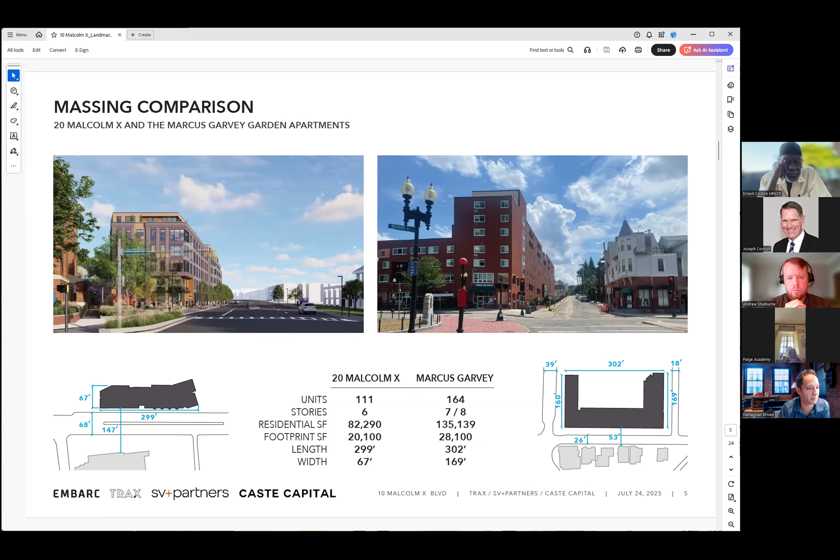Thank you, Andrew, for asking us to look at that.

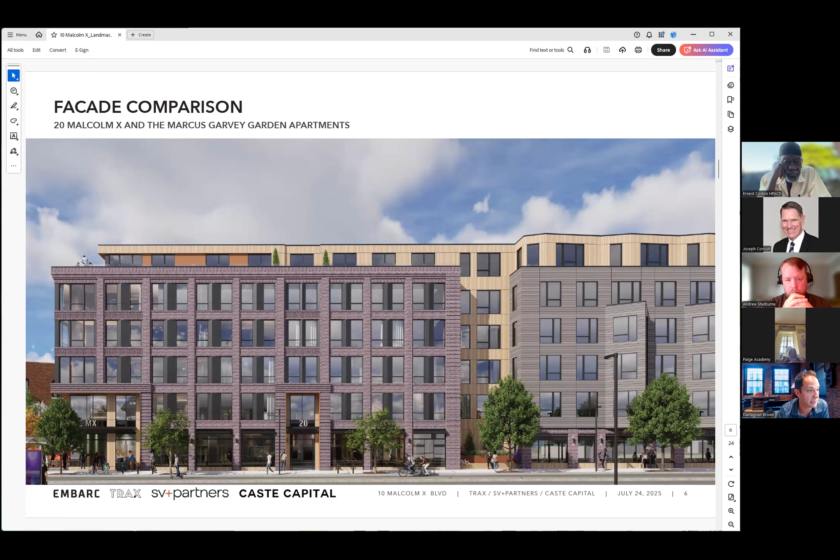Here we've done an elevation view of the 5 stories of brick, that rich detailing we talked about, with the setback that breaks the length of the building. And then in comparison, the 7-story with that center section that steps up to 8-story, just showing the quality in architecture. I think what we're very proud to have in our building.

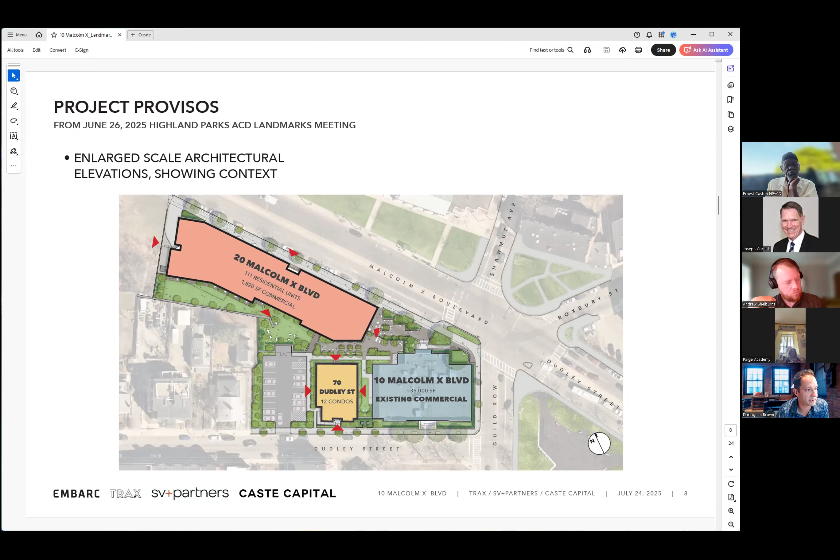With that, we're jumping into elevations. So what we've done is gone through for both buildings and shown this, again stripped down, removing all the trees, but just wanted to really get to the quality of the architecture and show you key moments, not only in the elevation, but the use of that detailing and calling out the richness of the brick, the cladding, the windows, the wood trespa.

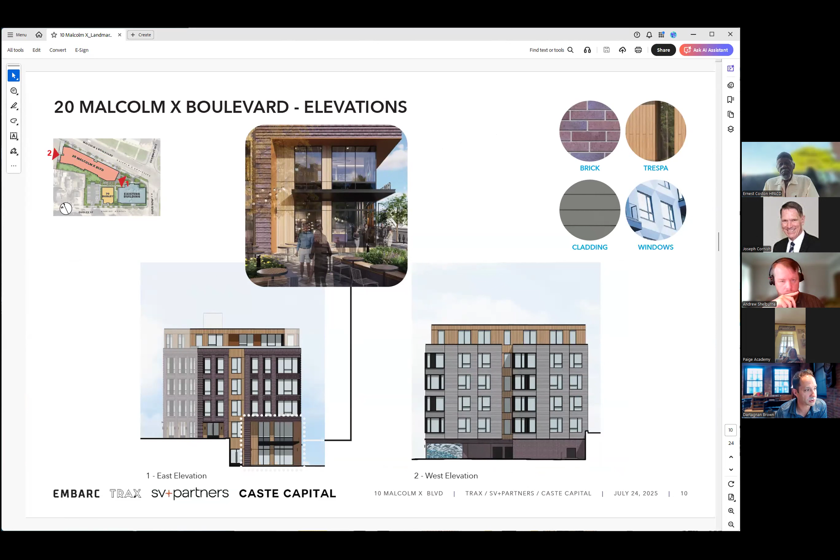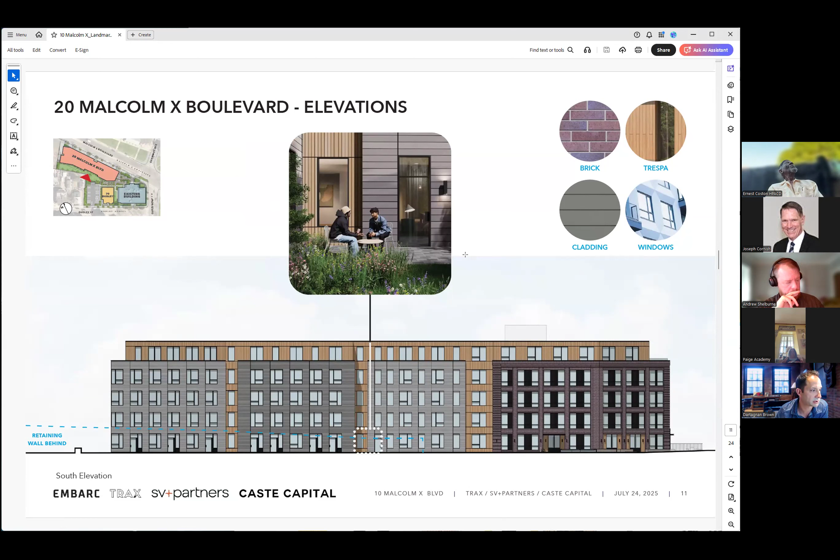As we flip around to both the east and west ends, here you can see the detailing of the first 2 stories at that community commercial space that spills out onto the public plaza. And then as we flip around, a lot of this is actually behind the retaining wall that we went through and were able to save and repurpose on site for any small section that needs to be adjusted. But this was really going to that richness of material, the brick, the cladding, and the windows, and the wood trespa as well.

And then here, what we thought was helpful is pull the snapshots of moments around the building in closer detail to just show the quality of architecture, starting at the upper left, running across the building down, the bays that we had a nice play on the neighborhood, kind of folding out with that warmth of the wood coming in, and then ending up with the lower left at that community-based retail.

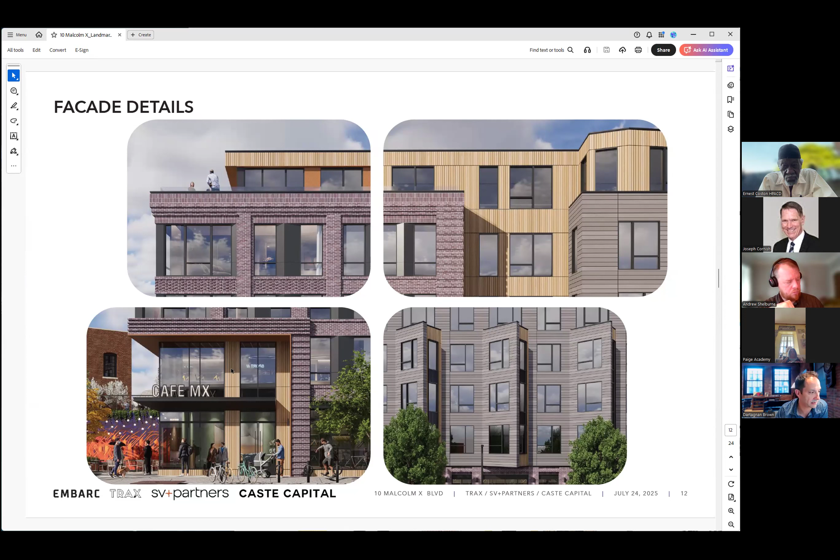As we flip over to Dudley Street, I think, Andrew, you pointed it out that we are at 3 stories, even though we have the 4-story right across from us at 69 Dudley, but we did work with the abutters very closely to reduce that height, and it kept it in line with the existing building at 10 Malcolm X, which will remain. And I think, Joe, as you pointed out correctly, we will preserve the quality of that architecture and under a separate application, come back for work around the future restoration of that.

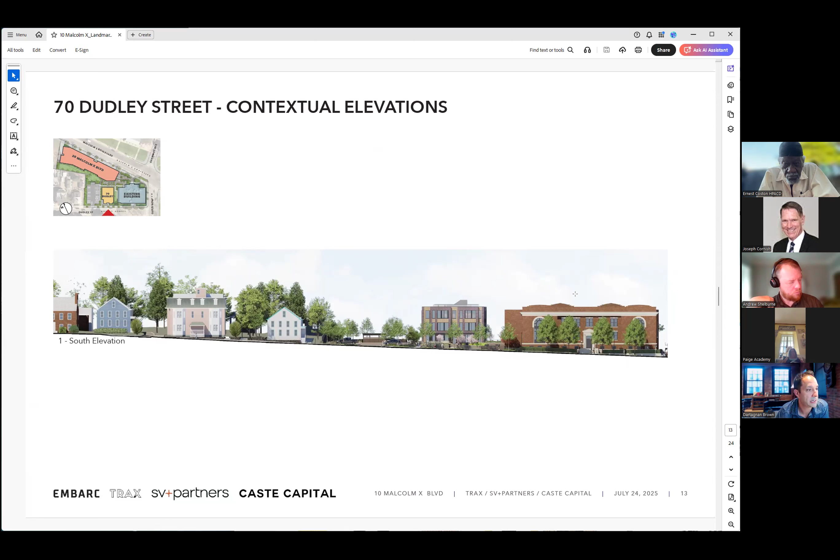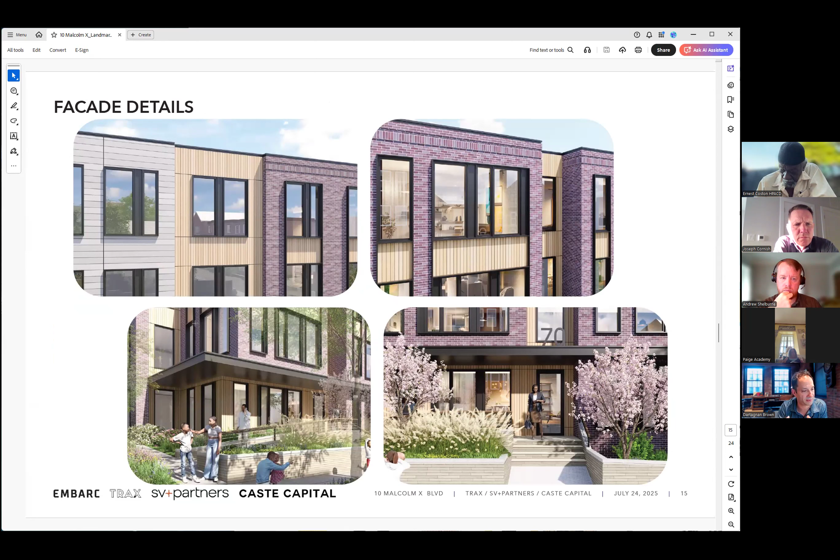But here, honing in on the elevations, moving from the south to the east, down to the north and west, again calling out key moments, but really looking at the scale of the building, changing the quality. It is a three-story building, so while we have the brick and the warmth of the trespa, we are looking at a different scale, both in window size, kind of more private entry moments, as it relates to the 20 Malcolm X. So a little bit of a different tone brought down in scale for this building.

Excuse me, Mr. Brown. The material you mentioned, the trespa, is that the tannish material? Yes, that's correct. Okay, thank you.

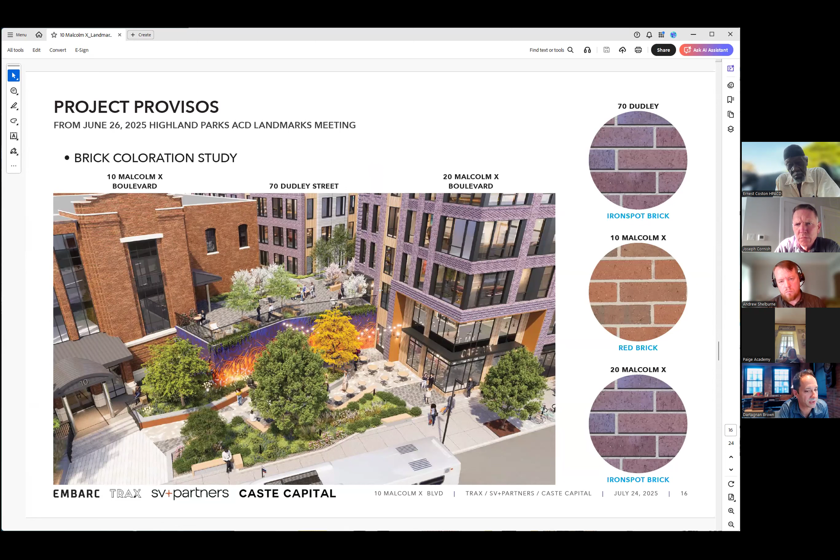Okay, thank you. And then here, I think this was a very cool study for us to look at. We discussed our setting up of the materials for 20 Malcolm X and that kind of iron spot brick, the red brick at 10 Malcolm X, and we had originally proposed the iron spot at 70 Dudley. What we've done is shown, within the neighborhood, there is quite an array of brick color and tone, which we think makes up for the richness and the character of the neighborhood.

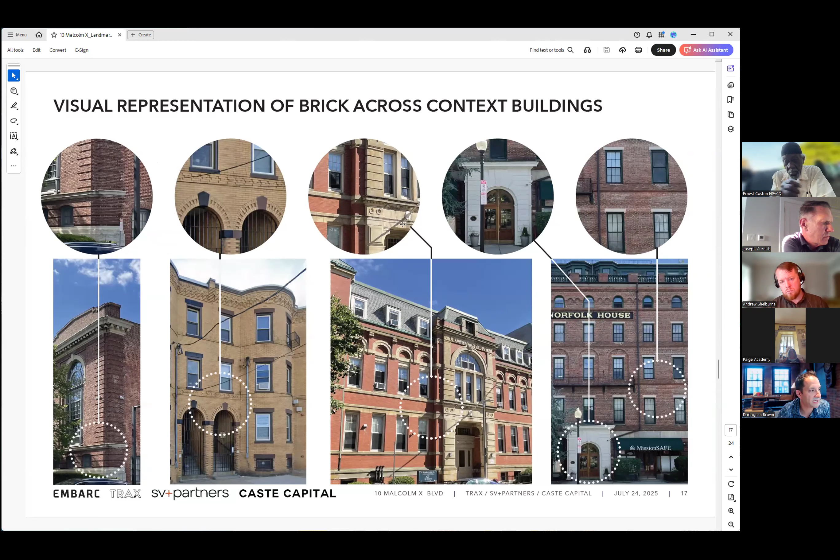And what we've done is taken the view which we had with the iron spot, as it was, and then looked at flipping it to more of a Sahara buff brick as one optionality. So not trying to match 10 Malcolm X, but differentiate, which we think is interesting because of the varied tones along Dudley and the neighborhood. And then this one where we maybe bring the warmth of the trespa in, but go to a red brick similar to 10 Malcolm X.

So the real question was, do we carry the iron spot from 20 Malcolm over to this building, or do we introduce something like the Sahara buff, or lastly, do we try to match the 10 Malcolm X? Love to get commentary on that. I think we have our take on that, but appreciate everyone's comment. And with that, Joe, thank you, and to the commission for your comments.

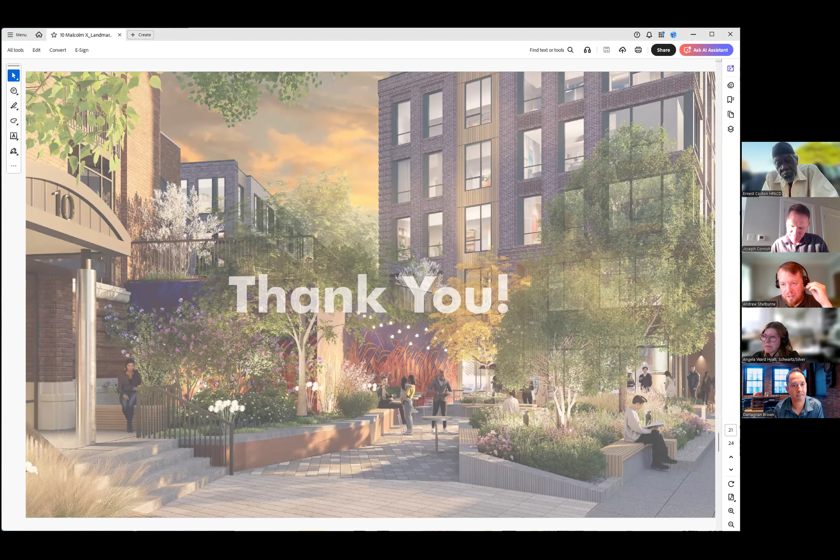We appreciate it. All right, commissioners, who wants to go first? Well, because you put it out there, I would love to know what your take, what the design team's preference is.

Yeah. Thank you, Angela. I would say personally, either the Sahara buff or the iron spot. I would tend to stay away from trying to match the red brick, just because I don't think, given the age of the red brick, and I think we've been the believer, if we acknowledge the new and not try to mimic the old, it's going to be much more impactful. And I think a stronger design, and if anything, really highlights the historic nature of the building rather than trying to compete or match it. So I would be completely happy with the Sahara buff. I think having the 3 tones on site is actually quite cool, and it's a little bit more warmer in scale, in tonal quality as the scale drops. So if the commission is happy with the Sahara buff, we would love to proceed with that.

Well, I thank you for looking at this. I think this might have come from a comment that I had, because I was looking to have more difference in this little piece facing this side of the property. And I really like the Sahara buff. I think you're right that there is an array of different brick tones in the district, and that by doing this, you really get to play on the array and the variety, and it's still obviously the same project. The detailing is, you've come up with a very rich, wonderful variation in detailing, and all the folds and the brickwork that you're doing, and the material palette. But by choosing a different brick color, I think it really is nice how it turns the corner of the project. So thank you for looking at that.

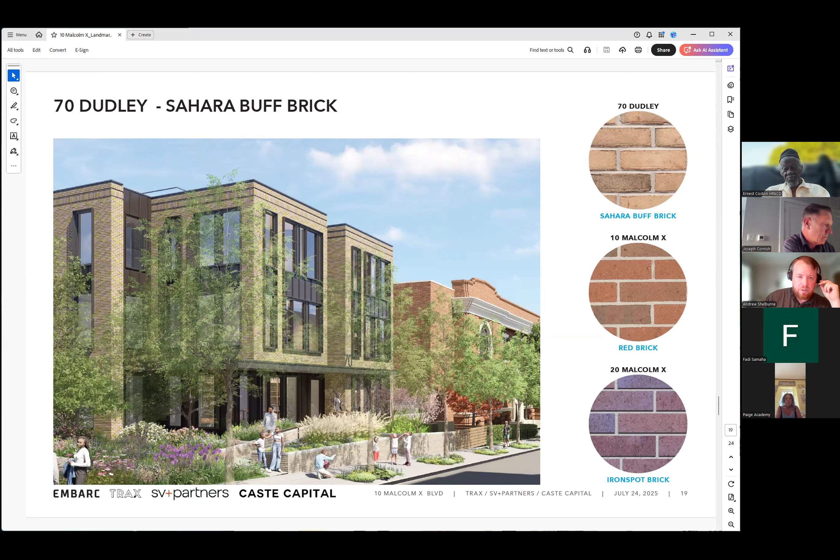I thought you guys did a great job of the comparison to Marcus Garvey Gardens building. I appreciate that. I was actually, you exceeded my expectations with that comparison. So I thought that was really good. Thank you, Andrew. I appreciate that. And you did an amazing job of responding to Commissioner Ward Hyatt's proviso with the brick elevations.

Thank you. The renderings are really incredible. I don't know if you guys do that in-house, but that's really impressive. Dan is the leader of that. I appreciate that, duly noted. They're very good. I appreciate the strong detailing of this building. All the buildings are very well detailed. So that's really it, I'm happy.

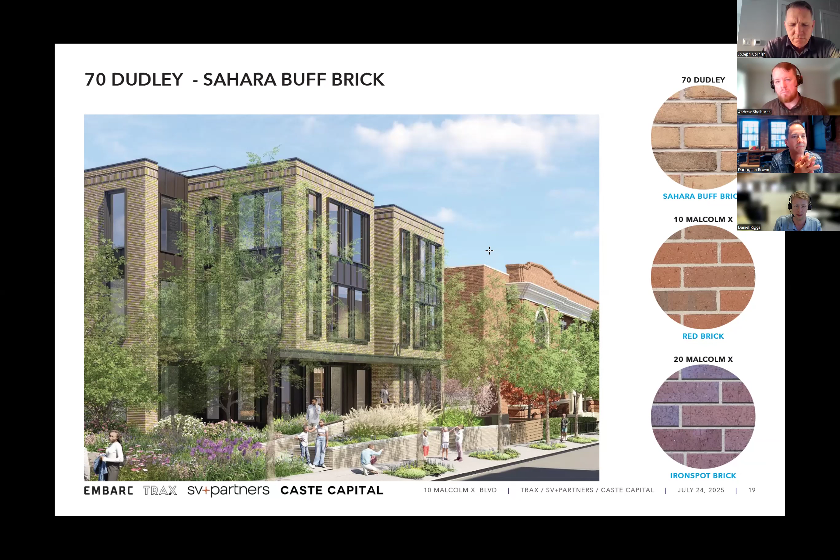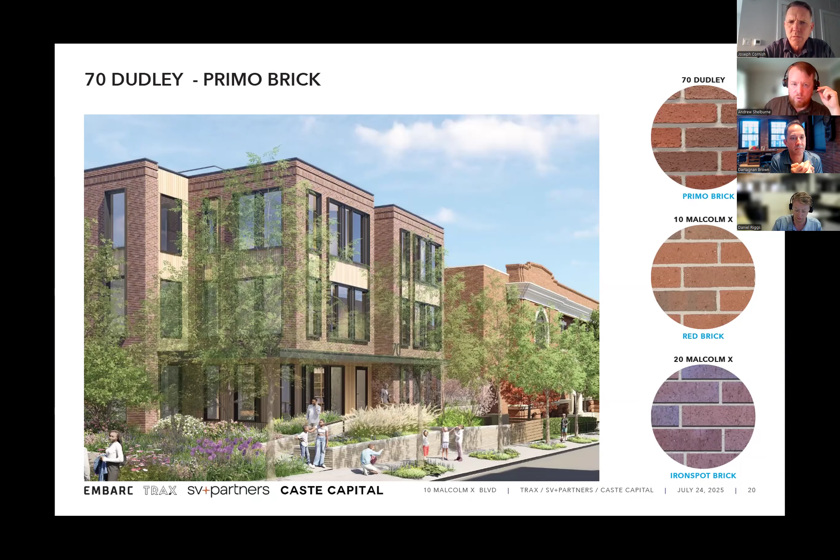I guess we have one thing. If I could, we do have that retaining wall. If we can just make some kind of comment about deviating from the study report, I think we can get through that and to public comment. Thank you, Andrew, and sorry Joe for not sharing. I thought I'd open it up to questions. So does anyone want to take a stab at that?

We're required to, if there's a shall statement in the study report regarding a certain thing, we're just supposed to give a reason why we're deviating. Andrew, can I make one comment? The study report does allow for modifications, it's under B8. Yes, I'm aware, Joe, and that's for creating an access point.

I think was this related to access at all? Well, the thing of it is right now there's no access point needed, right? But as soon as you put a building there, that access point becomes needed. So it's kind of a chicken before the egg sort of thing, I guess. I don't know how to explain this, but right now there's currently no issue with the access, right?

The building could be modified to make an access point, not instead of the wall. But so we just need to say why we're supporting changing the wall, per the words in the study report. I'm sorry to be such a stickler with the language in the study report, but we get into trouble if we vary from that.

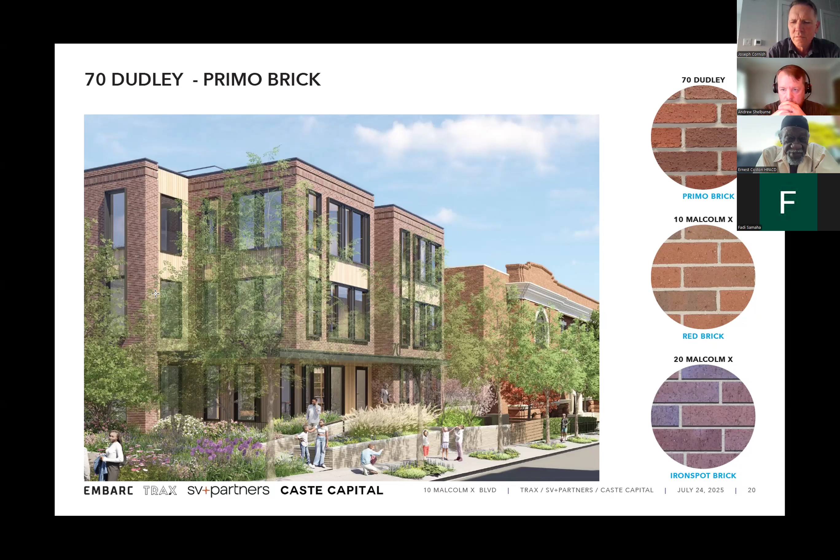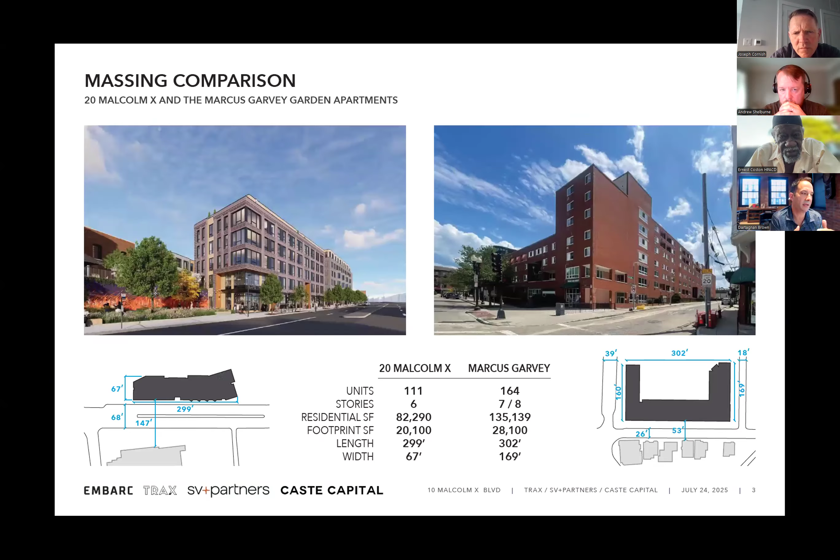So does anybody want to take a stab at that? Well, I'm confused now, there's no destruction on the wall. The retaining wall remains, and so there is access without having to put the wall in there. So there is what they call emergency access, or it allows us to get access along the, I think if we're looking for a word around it, we are allowing access to the full back of the building.

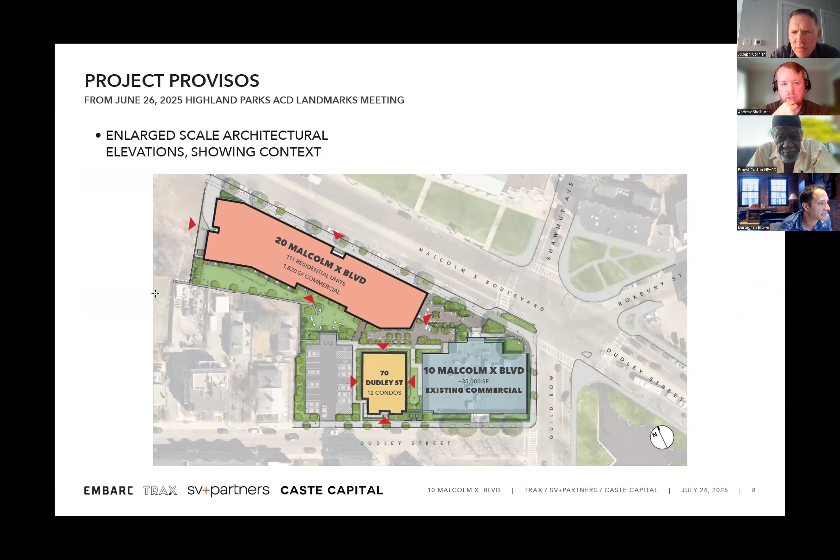Okay, which, sorry, go back to that slide. You were just on it, Joe. Yeah, the site plan, if you can zoom in there into behind 20 Malcolm X, please. Yeah, I can. There you go. Can you see how the wall turns there?

That's Commissioner Costin. We're just moving the wall and turning it. So that actually, Andrew, to your comment, allows access to the rear of the building. If it continued straight, it would actually block access. Right.

Okay, so I mean generally I'm okay with this. I just wanted to make a statement about us not following the study report and stating a reason why we're not doing it. I think you're doing the wall justice with how you're turning it, and that courtyard area is quite nice. So I'm okay with this, but I guess we're making an exception here in this case.

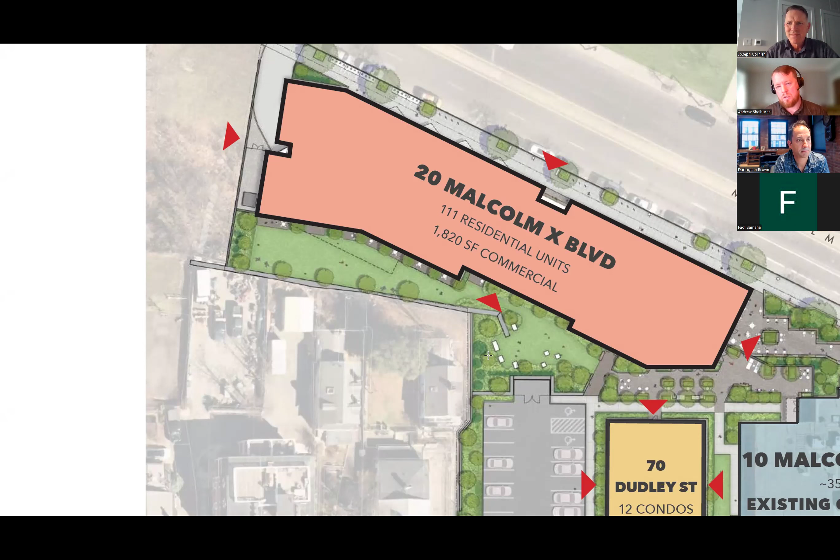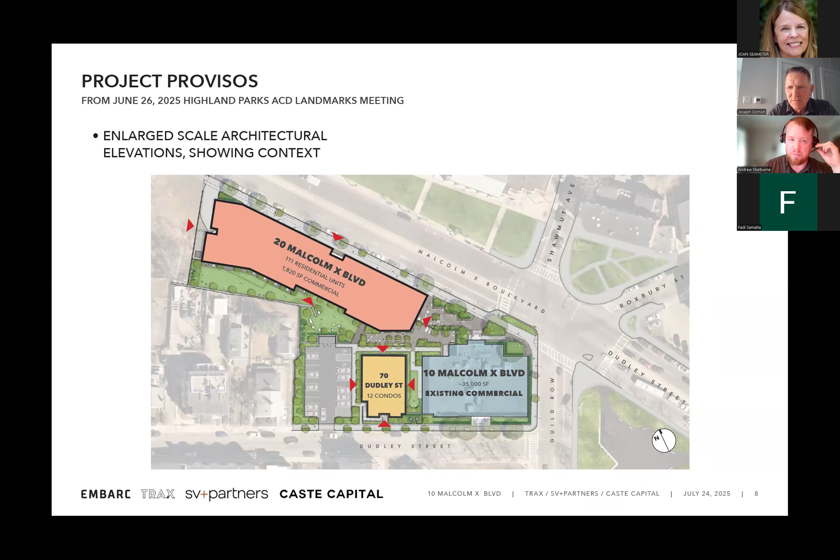Thank you. So can I motion to approve this project with these provisos, or how does this next step work? Yeah, you can make a motion to approve and read out the provisos. Actually, no, sorry, we cannot go to motion right now, we have to have public comment. Oh yeah, okay, my apologies to the public. Let me get to the script here.

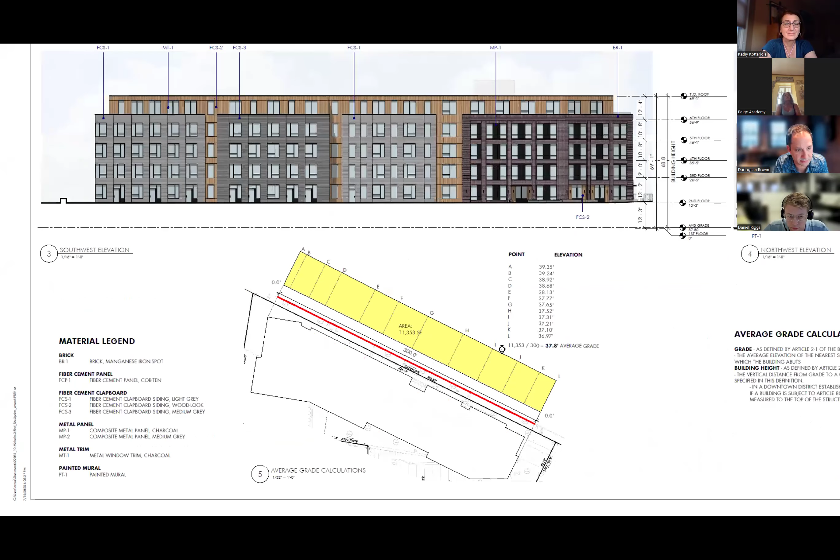Go back and look for it - but it was definitely in the deck, and I think something like - Dan, correct me if I'm wrong - where we are removing the trees along the parking edge, keeping the mature trees along the street, and we were up like something like plus 70 on the tree count and something like 130 on the caliper inches. Yeah, that's right, we had a net gain of 74 trees, from existing. So we had spent, Ernest, quite a bit of time during the BPDA Article 80 process to address all of that.

Okay, I don't recall that part of the presentation, but that's on me. It was included. And so tonight we came back to really present the three provisos that the commission had kindly outlined for us. All right, thank you. Thank you. So, does anyone want to second my motion?

I will second it. I will do the roll call vote. Commissioner Shelburne? Yes. Commissioner Samaha? Yes. Commissioner Cook? No. Commissioner Ward Hyatt? Yes. Commissioner Costin? I'm going to abstain.

So this is Commissioner Celina. Oh, I'm sorry, you joined. No, I joined late, my apologies, I just wanted to let you know I've been here. Do you want to abstain since you may have come in late? No, I heard the bulk of it, so I will say yes. How much of the presentation have you seen? I've seen the entire presentation, and I was here for part of it and all of the public comment.

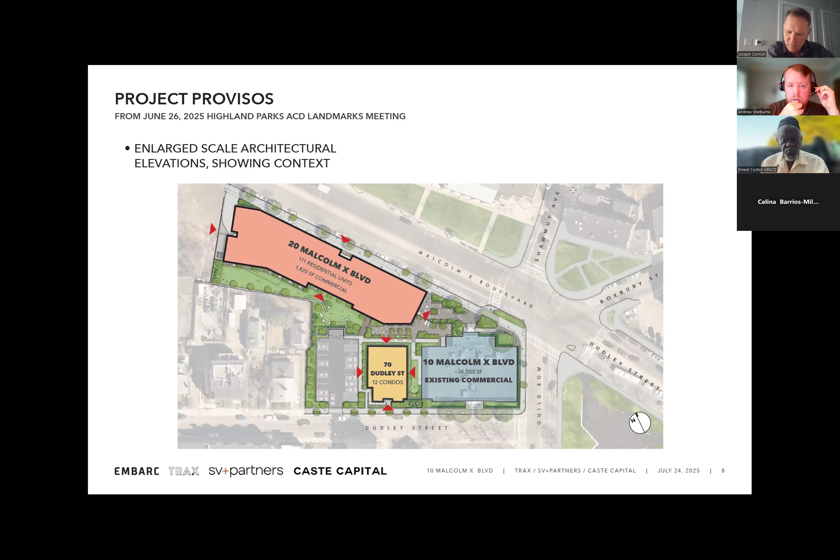Okay, thank you. All right, so we'll move to our advisory review next.

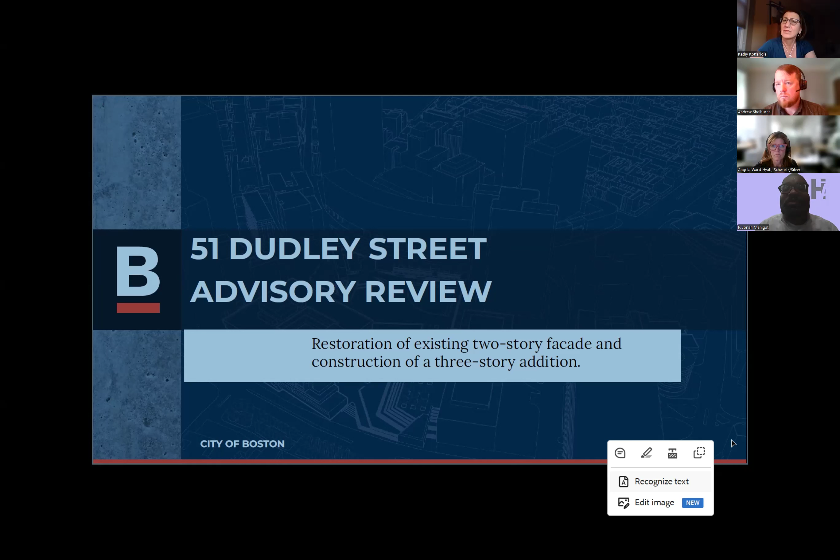My apologies, this is Commissioner Cook, I tried to wave my hand but for some reason I was not allowed to, it was blocked, I don't know why. Commissioner Cook, I'm sorry, I didn't hear what you said. I have to leave the meeting. Okay, all right, thank you, appreciate your attendance.

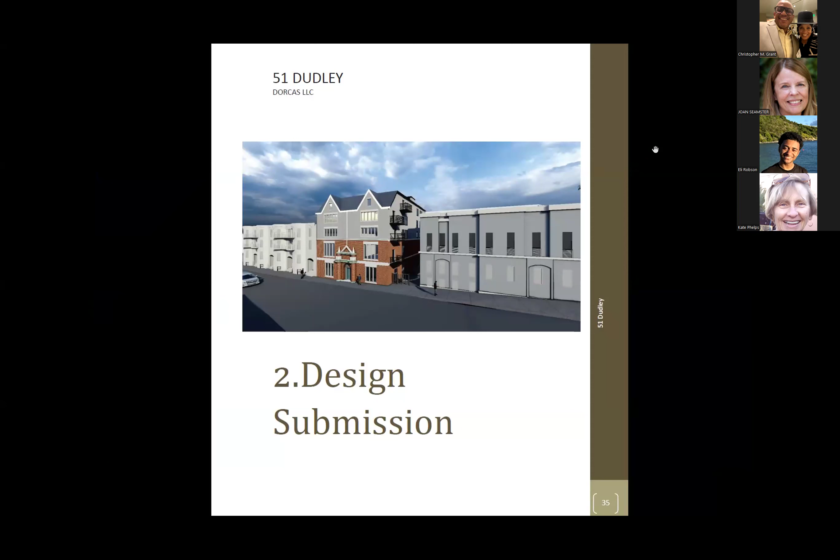Can you guys hear me? Yes. All right, would the team like to share your own screen? It seems like someone has started sharing. I'll stop sharing if someone from your team wants to share. Okay, I'm gonna try to share, is that all right? I'm on the road, so if I have a problem, someone else will try to share.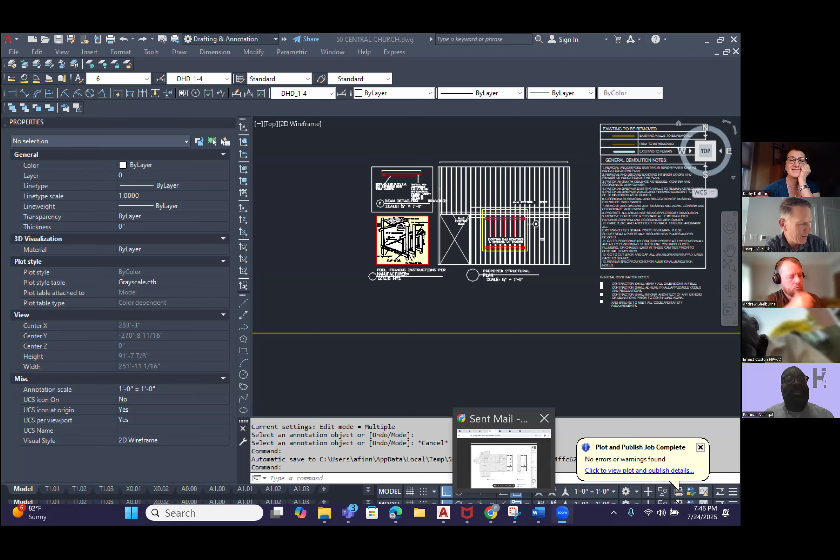I'll give some background: the existing building was designed by architect Augustus Warren Gould and built circa 1895 as the clubhouse for the Dudley Association. It later served as the headquarters for the Lettish Workmen's Society, an early part of the organized labor movement in the United States, and then became a Masonic lodge. A fire in the 1980s destroyed the upper stories of the building. Staff notes the applicant has been working closely with the planning department and staff at the Boston Landmarks Commission to develop the current project proposal. So with that, I'll turn it over to you.

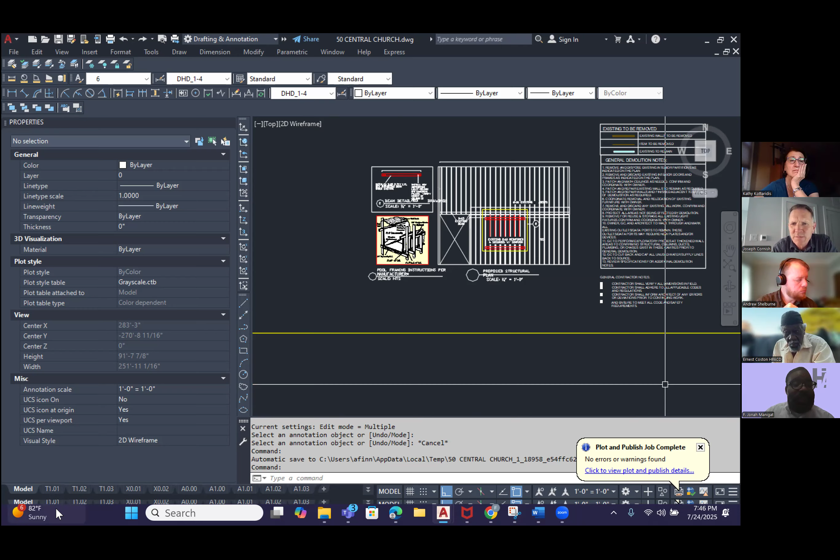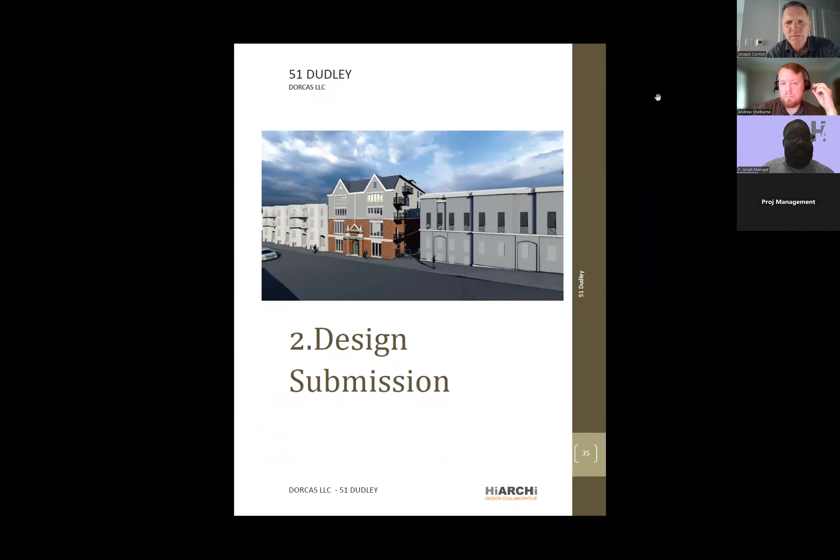Let me see if I can get to the screen I'm looking for. I don't think that's it, just bear with me here. I'm happy to present if you'd like. Why don't you go ahead? Okay, I'm not at my desk, I'm on the road and having a little trouble here. Hopefully everyone can see this. Well, I can't for some reason. Why am I not seeing it? Commissioners, can you see this? No, I'm seeing someone looking at AutoCAD drawings. Oh, because maybe I'm still sharing, the proponent is still sharing. Okay, I stopped sharing, hopefully that will work. Can you see my screen now? Yes.

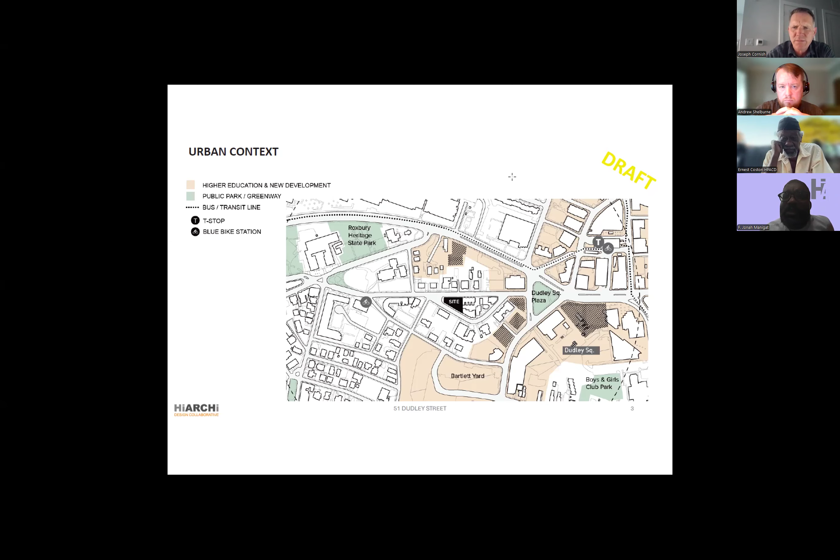This project is being proposed at an old site which I believe was a Masonic Lodge at 51 Dudley Street. If anybody's familiar with the neighborhood, it's a building that's been vacant for quite a few years, quite an eyesore, that the client is proposing to revitalize and turn into 18 residential units.

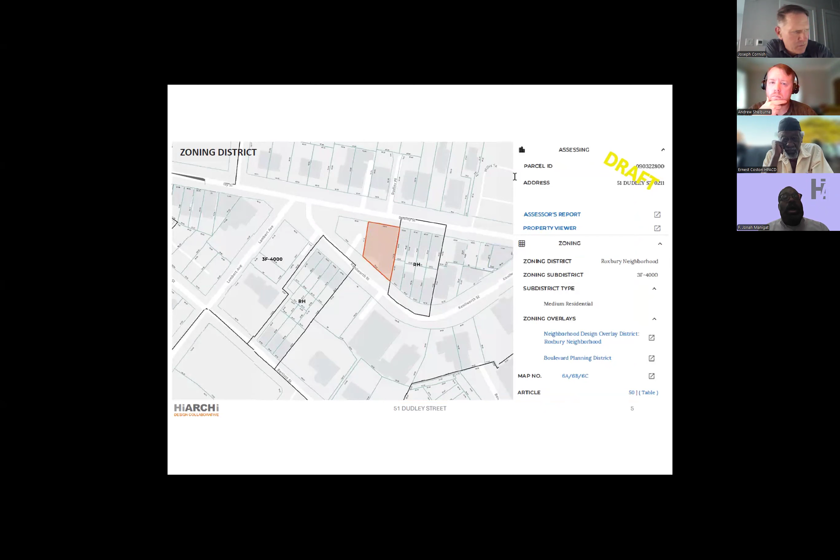What we have done, as part of an edict from the client, was try to bring the original aesthetic of the building as much as possible. Considering the program has changed from a public use to a residential use, the actual uses are changing, but we tried to keep the flavor and architecture of the building as much as possible.

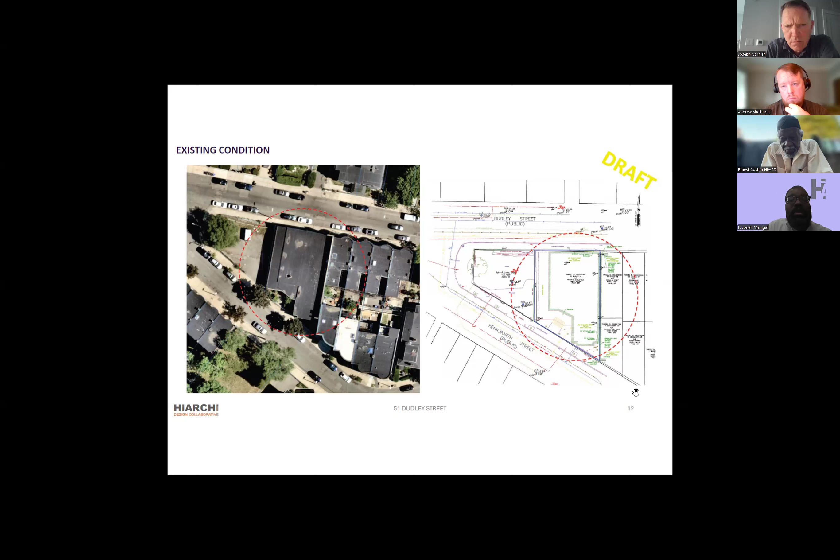In these slides you'll see red boxes. The white part at the bottom is the existing building, and we're showing the red on top to show, for massing and scale, what we intend to add to the building.

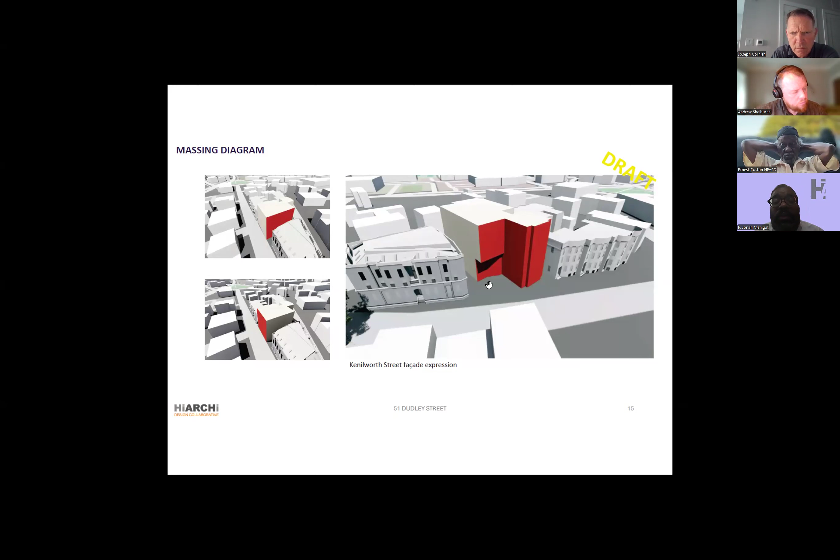A couple more views showing where we're doing interventions and adding to the building, on the left two slides. You'll see views from Dudley Street, and a view of the corridor between our building and the proposed building at the corner. On this one, that will be the view from Kenilworth Street.

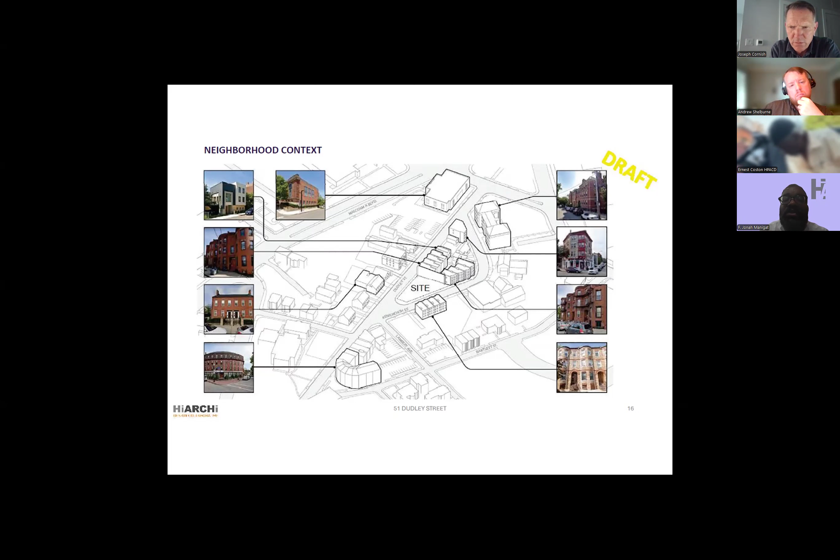If you walk the Holland Park neighborhood, especially in this little cluster, you'll see a lot of different architecture. You'll see some tall buildings, some short buildings, some with hardy plank siding, and a lot of brick buildings. You'll see some modern buildings recently added to the street, along with a lot of townhouse-style buildings added in the last 20 to 30 years. So it's an eclectic mix of different building types, not just one language in the area. I think our building will be a nice addition to the different architectural styles that currently exist in the neighborhood.

Next slide please. This slide talks about the alleyway we discussed. On the left here is the proposed building, and the right is our building. In between the two buildings, we're creating what we're calling a pedestrian corridor that would allow you to go from Dudley Street down a nice green area, a greenway with a pathway. It allows you to go up a set of stairs to a common deck facing Kenilworth Street, and then down to Kenilworth Street. Right now the two streets are disconnected, so this is a way of connecting Dudley and Kenilworth Street, allowing a pathway between the two.

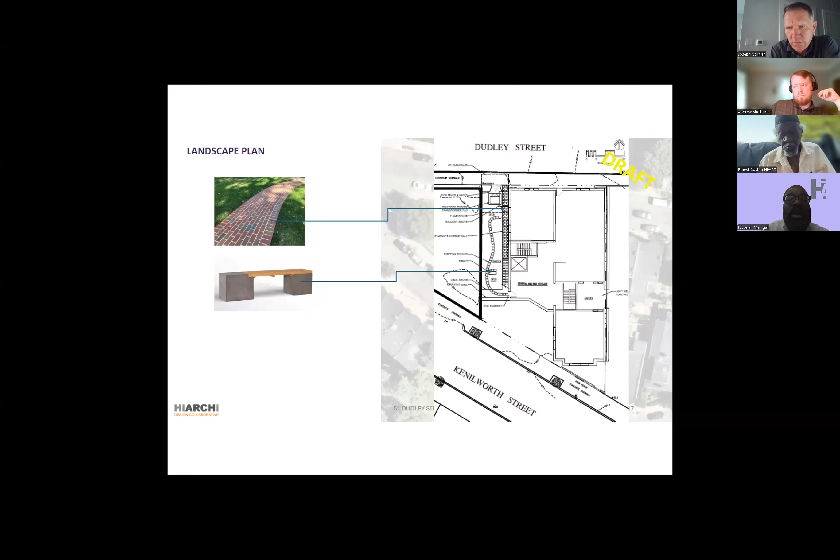Next slide. This slide talks about ways we're thinking of enhancing the streetscape. Our main accessible entry to the building will be on Dudley Street. What we intend to do is keep the original historic entry to the building, and just do some minor modifications via the sidewalk, and maybe the step at the front, to allow the building to become accessible from this end. This will be the official front door of the building, so we'll make that accessible, and we'll look at ways, with help and permission from the city, to add some street trees to beautify the sidewalk as you enter the building.

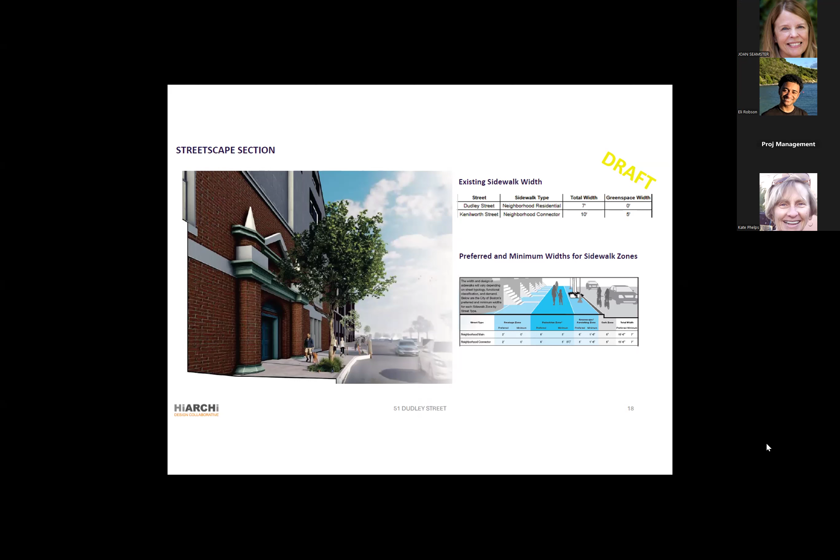Next slide please. Here we start talking a bit more about the architectural site plan of the building. You can see the shaded area on the left-hand side - that's the proposed building. Again we've got a pedestrian corridor in between, then we have a proposed building, and on the right you can see some rooftop views of where the building is going.

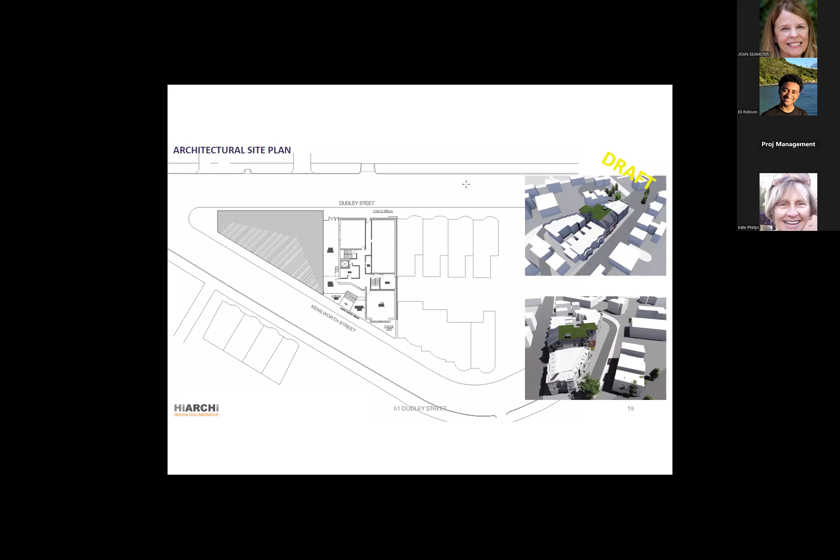One of the things the owner has asked us to do is look at a way to make the building as sustainable as possible. So other than using materials that are sustainable, along with the windows and the energy systems, heating and cooling systems we plan on using, we're also thinking of adding a green roof onto the building. It will not be a green roof open to the users for entertainment or anything like that, but it'll be mainly to help with the load into the building. We don't know exactly if it's going to be a tray style or a planted roof, we're still debating that, but it will be some sort of green roof at the end.

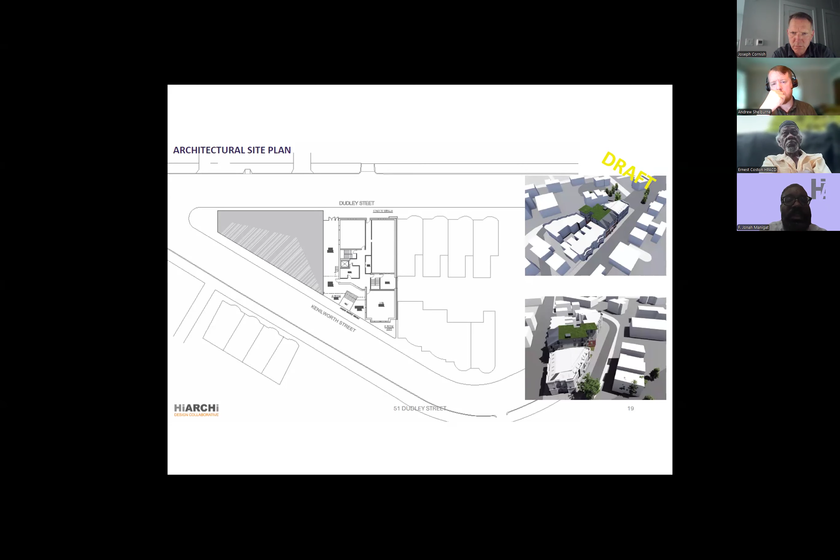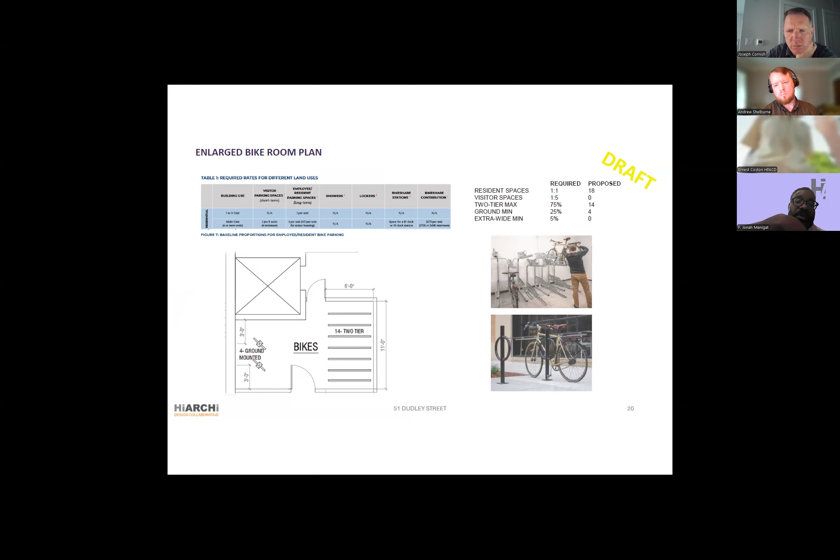If you go to the next slide please. We're proposing 18 units, and we're proposing 1-to-1 bike spaces for each unit - there will be 18 bike racks in a secure location in the building, accessible either through the pedestrian corridor I've talked about earlier, or through the building while you're inside. So the tenants don't necessarily have to go outside to get access to it. They can get to it from their unit, or from the exterior coming from Dudley Street, or even from Kenilworth, from the common deck I brought up before.

So here's a couple of the unit summaries - what are we proposing? What we're proposing is a mix of 2 bedrooms, 1 bedrooms, and studios.

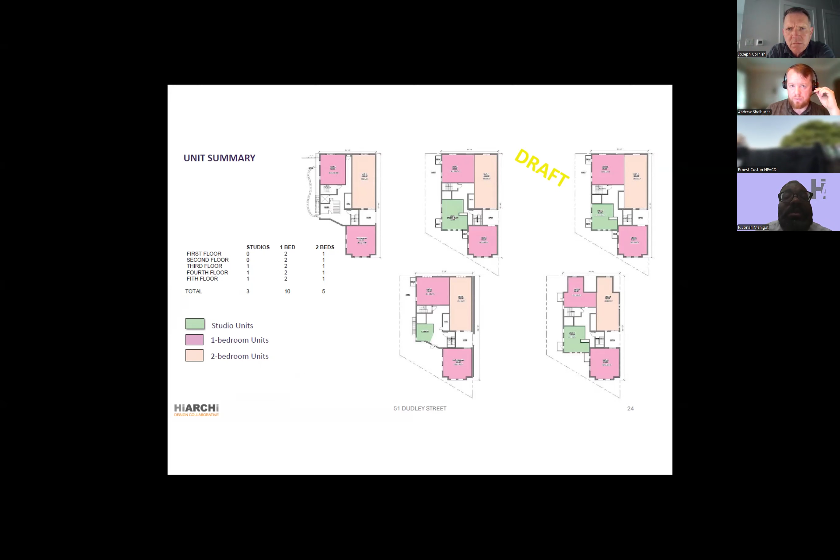Excuse me sir. So we don't really have any jurisdiction over the interior of the building. Okay, well then we can skip that. Yep, if you can just skip that, yep, that would be good.

That'd be great. It's fine with me.

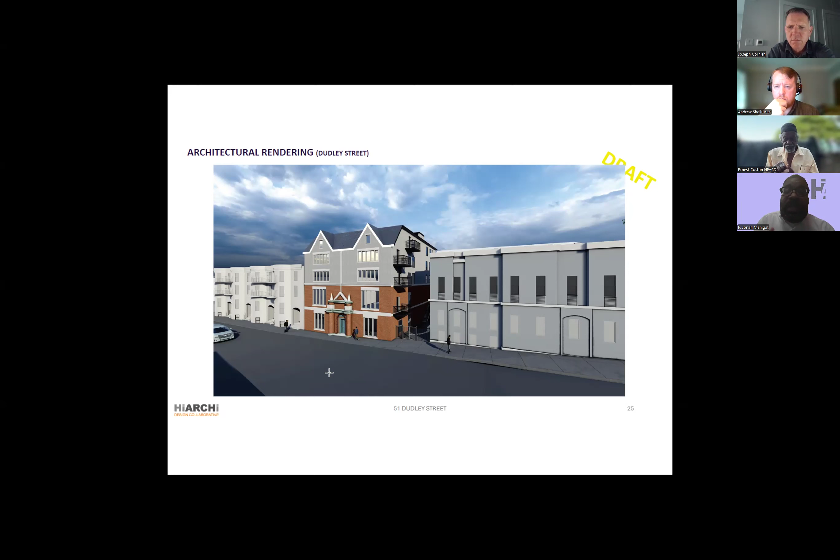The bottom part rendered in brick is the existing building we want to keep as much as possible. After many conversations with the city, including landmarks and BPDA, our hope is to keep the historic part of the building intact and add a 3-story addition on top, using material that will not compete with the brick, while keeping proportions in keeping with the historic nature of the original building. A further slide will show what the original building looks like.

I think you just skipped to the Kenilworth side. This is what the building will look like on the Kenilworth side. In this view you can see some inkling of the green roof I mentioned before, the common deck I talked about, and the brick part, which is a lower level that will remain.

Next slide, a couple more views from Kenilworth. This shows a better view of the common deck, and the pedestrian corridor that allows you to go from Kenilworth down to Dudley Street, connecting the two streets, which right now does not exist. Next slide.

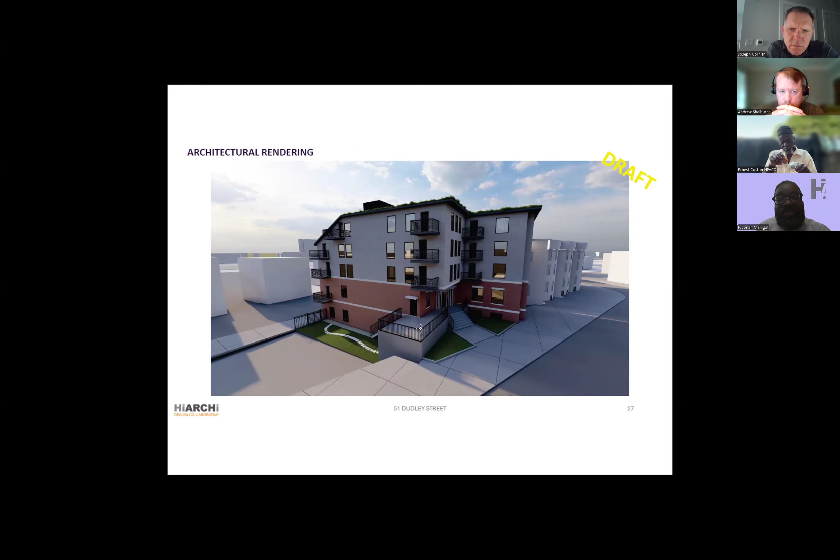A couple more views from Dudley Street. That gives the building a little bit more context between it and its neighbors. Again, more slides. Thank you, I think those speak for themselves.

Speaking of material, what is our hope here to use? Our understanding is it'd be very hard for us to replicate the classic brick that exists in this building, so what we're trying to do is not compete with or mimic the brick. We want to introduce a different material for the upper floors that will complement the existing brick. We'll wrap that around the pedestrian corridor and bring it back into the Kenilworth side, which I think will tie in the building pretty nicely.

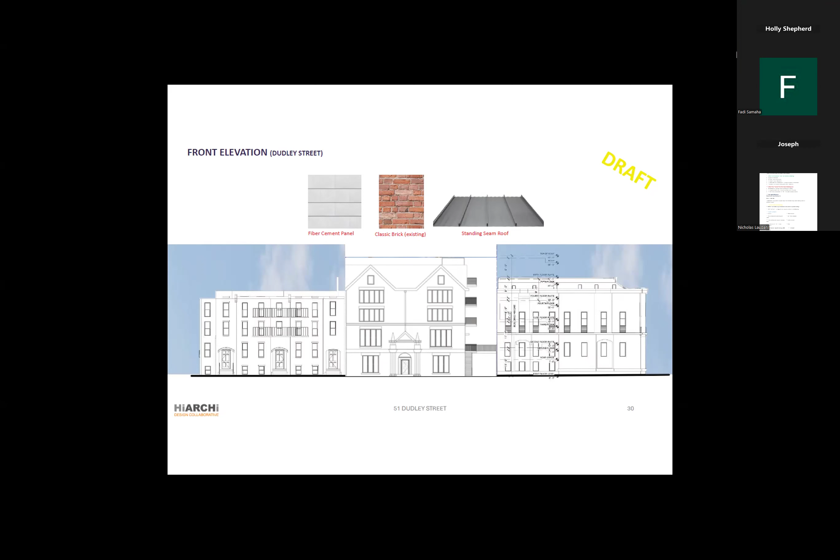So now we have those two gables on the front that reminisce of the original building's look, and our hope is to use a standing seam roof at that front part of the building, and then of course as you go towards Kenilworth, we'll have that green roof.

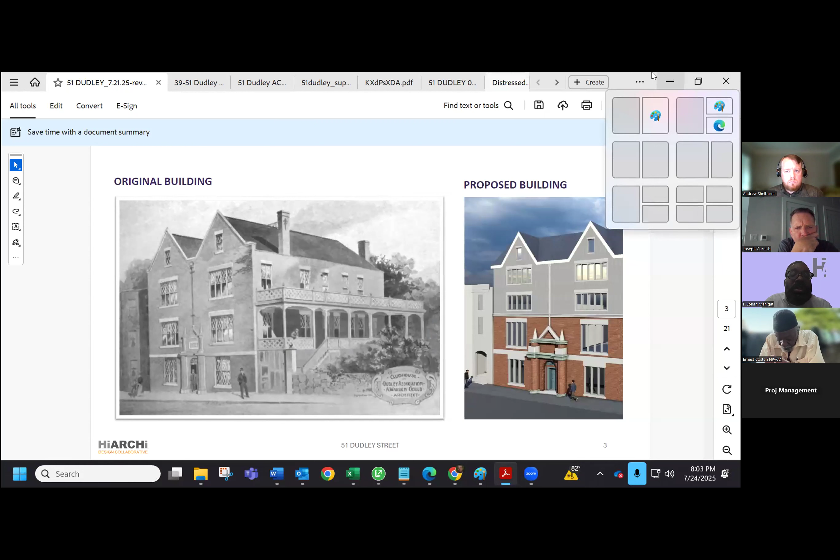Also important to us is keeping the relationship of our proposed building similar to the relationship of the historic building to the townhouses. If you look at the townhouses on the left of both buildings, you can see the relationship between the townhouses and the original building, and the townhouses and our building. So we feel like we're bringing back what was originally there in terms of scale and feel, kind of bringing it back to its original feel, for lack of a better word. That's why we have the gable roof style, reminiscing.

You can see the windows use the same kind of divided lights and scale that was there on the original building. Of course, there are some deviations because this building was more of a public-facing building, while the new building is residential. So we had to compromise on window locations for the units and interior to work. But I think we've come to a nice compromise that allows a functioning floor plate while having a front facade that respects the original intent of the building.

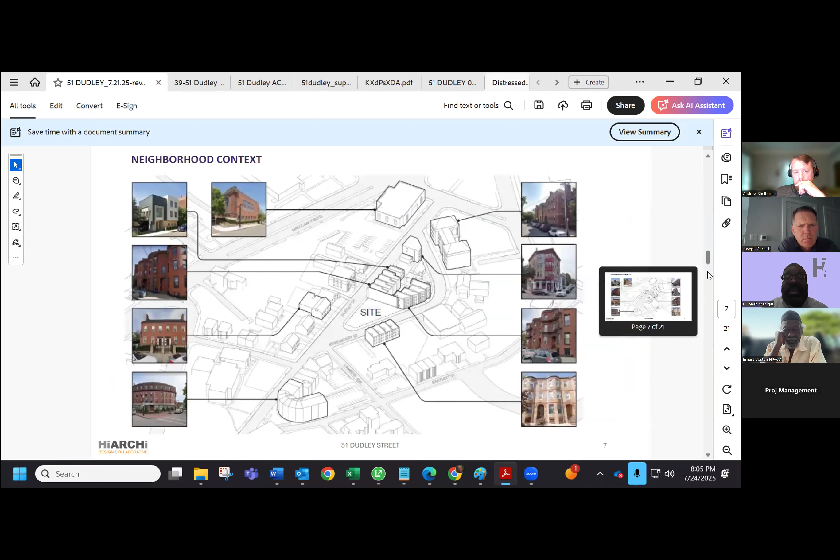Okay, is there anything else on this? No, I think that's fine. Let's see, just quickly, yeah, some of these things we talked about. We want to talk about the landscaping here.

Often people think of a light well as boxed in on all four sides, just open to the elements above. In our case, we're planning a three-sided light well, because we're going to punch an opening facing the alleyway, allowing a lot of air and light to come in, creating a little green area accessible to the tenants on the ground floor.

The Kenilworth side will also have a green planting scenario that complements the community with treescapes, plus another green space with trees and shrubs at the Kenilworth entrance. The design also includes an elevator to accommodate accessibility, which is important to us. Looking at the Dudley area, there aren't many buildings that meet current accessibility standards, so we think this elevator is very important to provide accessible units for handicapped individuals. We're working with the city and the accessibility board on that access plan.

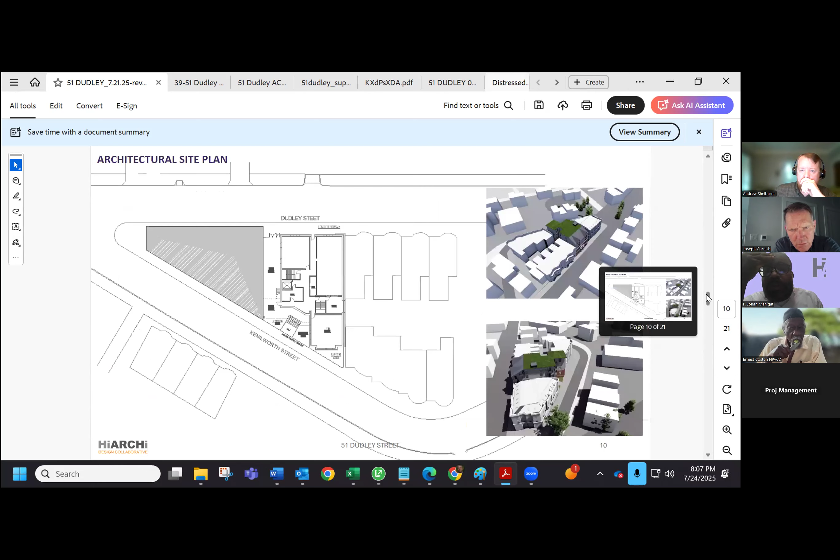Thank you, Charles. Okay, Charlie, if you can just bring it back to the slide with the historic building next to our building, then we can open it up for questions here.

Sure, yeah, commissioners, this is an advisory review, so we're not going to be voting on this project. This is just to get your feedback and comments for the project team. Are there commissioners who would like to comment first?

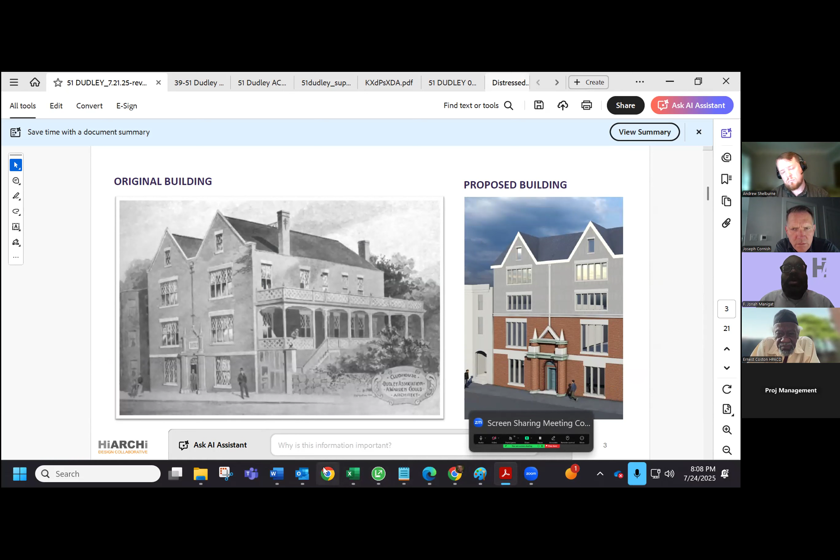Yeah, I have a question on this passageway between the two buildings. I don't see the width of that. How wide is that? It's currently between 13 to 14 feet. It's pretty generous. Okay.

And the other question I have is on the light shaft that goes down through the building. Is that only accessible by one unit? No, it'll be accessible by all units because it's off a corridor on the ground floor, so every unit will be able to access it. So it's public space on the ground floor? Yes, it's public space for the tenants. Got it, okay, got it. Thank you. No problem.

Other commissioners? I will say, per the study report, commissioners are specifically required to provide detailed reasons for every decision they make. That's page 79 of the study report. So we are actually required to make comments and share our opinions. Thank you, we're here to hear them.

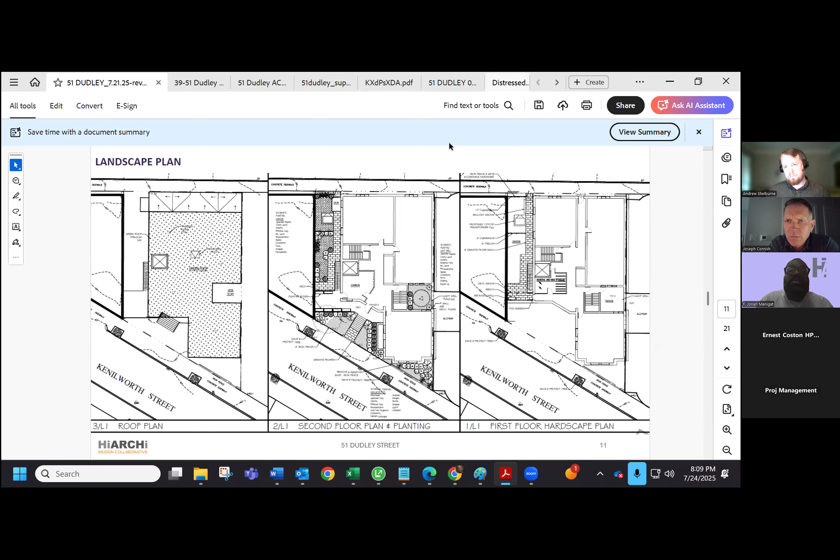Joe, that's your reading of page 79 as well, right? This is an advisory review; we're not deliberating on making a decision tonight. We're providing comments and feedback on this project, so hopefully they can come back in the future with an approvable project. Okay, but we do need commissioners to participate. We can't just sit and be quiet, that's not our job here.

Are you requesting a response from somebody? I think all commissioners should speak up. Obviously they've all taken time to review this presentation in advance, and they should have comments related to how this building relates to the standards and criteria. That's our job.

If no one else wants to go, I'll jump in here. I would just urge commissioners to read page 79.

So the original building is 4 stories here, and you're proposing a 5-story building. I would like to see the facade on Dudley Street rebuilt in its entirety. If you want to do a different roof after those 2 gables, I think that's okay, but I like that you're kind of replicating the 2 gables on the Dudley Street side.

I'm generally okay with the materials chosen, especially standing seam metal. And I agree that you should not be trying to replicate the brick. The addition materials should read differently. We shouldn't be trying to copy the brick. It's almost impossible to do that anyways.

I'm generally okay with the garden space, which is being put in place of the porch. I think that's a fine idea.

But I don't see a lot of argument to make this building 5 stories. If you referenced in your response section 8.4, which talks about diversity of building massing and height, it goes through and talks about different streets that have 4 and 5 story buildings. But the streets mentioned in that section, for instance Kenilworth, really the max height is 4 story.

Linwood Square, max height is 4 stories. Highland Park Ave, max height 4 stories. There's one building on Fort Ave that is 5 stories, and we generally only have 2 tall buildings in the entire neighborhood, which is 170 acres. We have the Norfolk House, which is 7 stories, and the Marcus Garvey Gardens building, which is 7 stories, and if you count the elevator shaft, it could theoretically be 8 stories. The Cox building is 4 stories. So there's really not a lot of precedent to go to 5 stories.

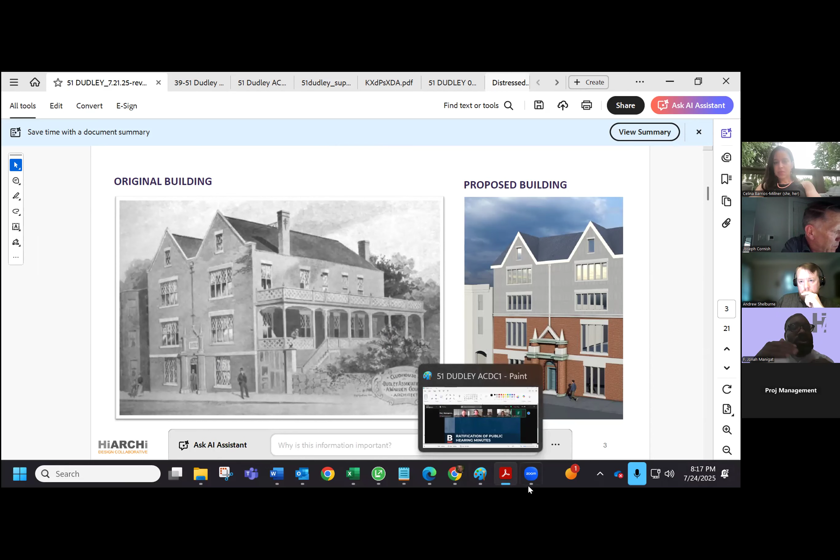I think the height works. If we look at the relationship between our building and the townhouses, and the relationship between the original building and the townhouses before all of us were born, you will see that we're consistent. So I think that's what governs this, as far as we're concerned. And if you look at other parts of the neighborhood, you will see even more drastic differences between buildings right next to each other.

I think Charles can show some of those here. You can see buildings that are basically residential, single family residential scale, right next to that 4-story building. I agree, I would totally be okay with making a 4-story building. You have precedence right down the street for that.

But what I'm trying to say is, if you look at the scale of a building, the overall height of a building, and its relationship to the townhouses, it's very similar to what was there originally. I think that's what we're getting accused of. Now, we can disagree that we should mimic or replicate that, but as a charge from the owners and through multiple conversations with the PDA and folks from Landmark, we arrive at that composition because we feel it respects the original architecture and its relationship between the building and its closest neighbor.

And I think reducing the height of the building will end up hurting the building. Well, I wouldn't — I'm not suggesting that.

Sorry, Andrew, just a comment, and respectfully, I understand your point of view. Each floor, as we measure from floor to ceiling on the original building, was 12 feet. That's the reason why our upper stories are calculated at about 8 feet each. So our story count may not necessarily reflect the proper measurement based on the original building's height. Yeah, it probably had big spaces inside the public building when it was there.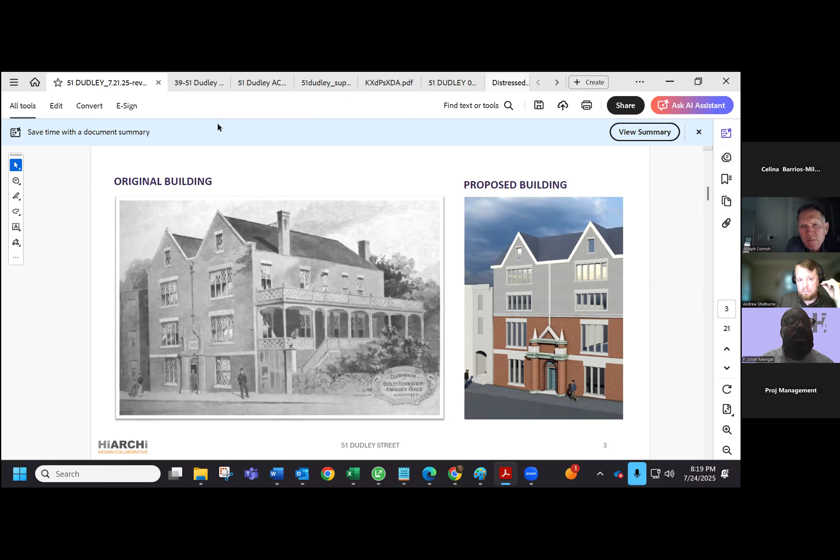But I just want to clarify that I'm not asking you to reduce the overall size of the building. I'm asking you to reduce the number of stories. So the height you see in the historic rendering, I'm totally good with that, and the relationship of that height with the neighboring row houses seems appropriate — that was what was there. So your problem is the number of stories, not the height.

Exactly. You have a lot of windows in there, and in the upper floors they look smashed in comparison to the lower floors. There's a proportional issue with the windows. The historic facade is obviously very symmetrical — the windows on the sidewalk level are smaller, but the four windows above that are approximately the same size, they look identical. In your rendering, the newer floors have different size windows than the lower floors.

Yeah, and I think from the development standpoint, obviously the architectural side is the driver here regarding the commission. We're driving the design to have a bit more density for the future relative to the original design, due to the cost of construction and the cost of an elevator for accessibility. Accessibility is a key factor in our decision making to make the building a little bigger versus going with 3 floors.

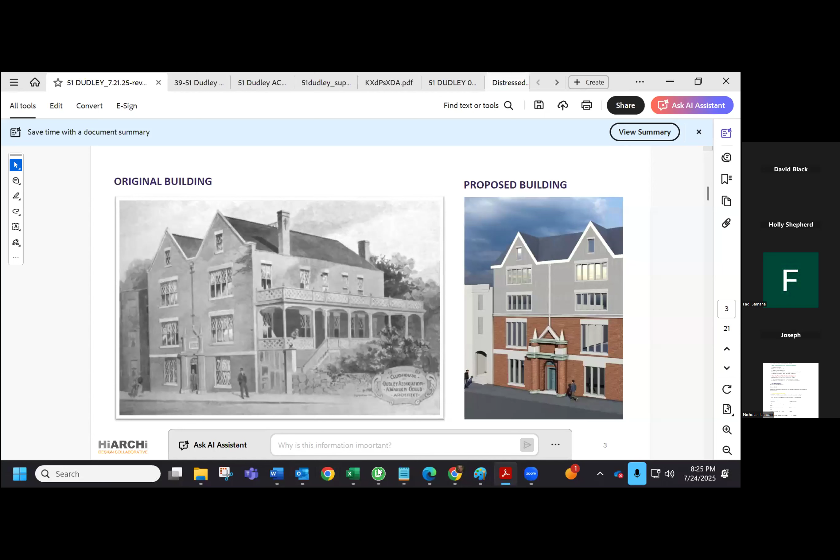Yeah, well, so one, we don't really have much to say as to how the building is used on the inside, whether it's a large public space with big windows in order to get as much natural lighting, or whether you're going to reduce it to 8-10-foot ceilings for however many units you can get in there. But what it looks like on the outside is important.

And I think that's really going to be what people are going to look at for a long time, and maybe whatever legacy we have - how did that happen? So what it looks like on the outside is important. So the height, I feel like it's sort of under control, it's within range, and if you can keep the facade and maybe change the floors and where they relate to the windows.

In some parts of the country, like Louisiana, people actually walk through windows because the windows go all the way down to the floor, and then in other parts, like Minnesota or up towards the Dakotas, they have very small windows only up to about your waist. So there's a variation in where the floor is in relationship to the windows, but the windows in this area should fit with how the building looked originally, while still making it possible. How many units you can get out of there - that's between you, the bank, and your planners.

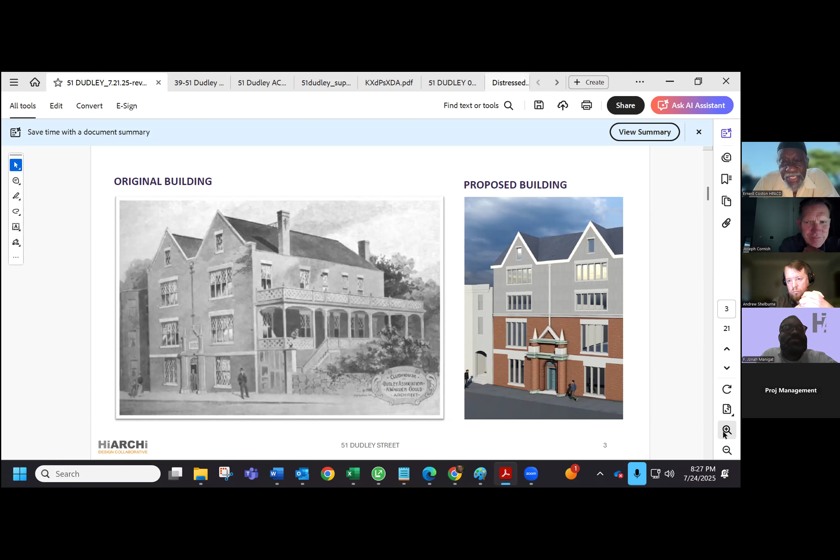Again, if I would like to say something, I can just chime in. Thank you, Andrew. Okay, but we are required to speak our minds here. I understand, Andrew, I'm listening. Thank you so much. Yeah, it's not just about listening though. We have Andrew to give them direction. I think it's okay, thank you. It's not. Andrew, we got it. It's good, Andrew, we got it. You made your point, Andrew. Thank you. Yeah.

All right, well, people are complaining that we're not following the standards and criteria, and this is just another example. So what's next? Yeah, what else is on the next agenda? Step, Andrew, thanks for the lecture. Thank you again for the lecture. Thank you. Thank you. You're welcome.

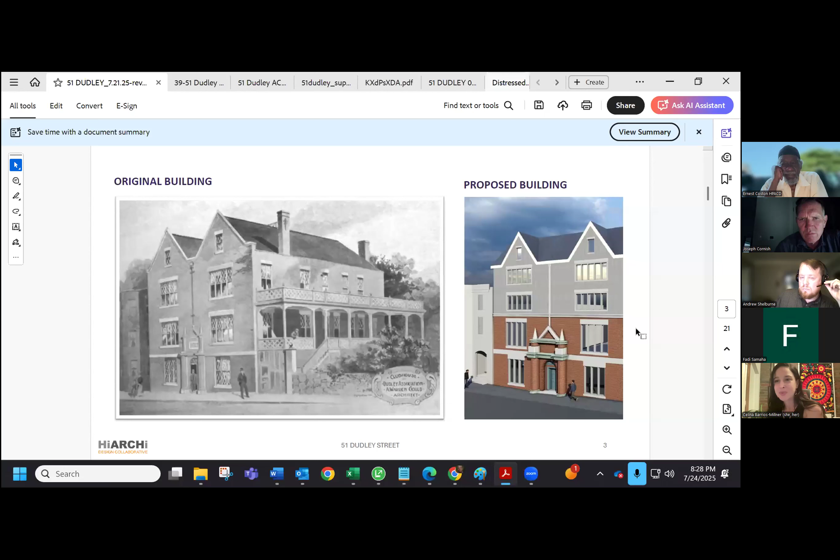You're welcome. All right, I think let's move on to public comment. I think there is a valid difference between advisory and design reviews, and where there's a vote involved versus where there's advice being given. And so I think we're all here to serve, and I think it's okay if there isn't specific advice to give - I don't think that's in violation of any of our standards and criteria. They're looking for advice, and so we need to give them advice. That's the point of this.

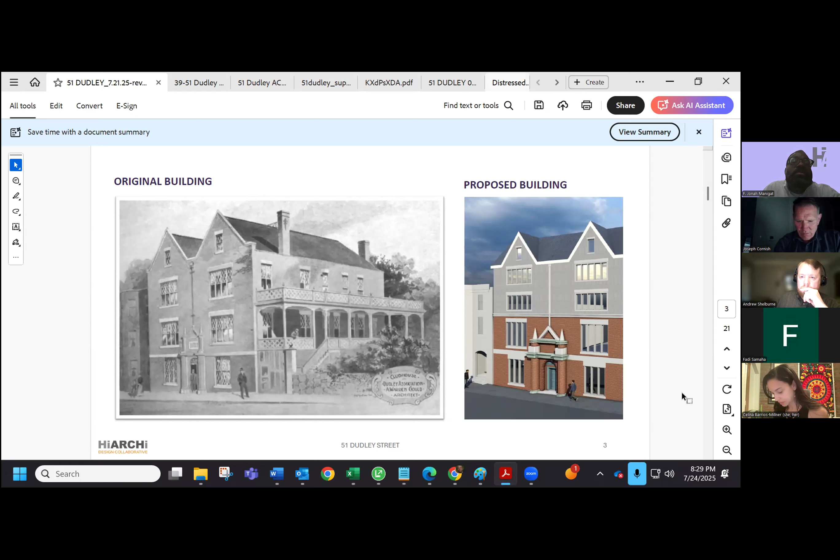I have to say we've gotten some good advice so far, but you've only heard from me. Andrew, I gotta say something about this meeting though. We keep making these meetings excessively long, and we've already had 2 commissioners drop off. If someone wants to say something, they can. If you'd like to have a meeting, Andrew, to discuss this at another time, let's go.

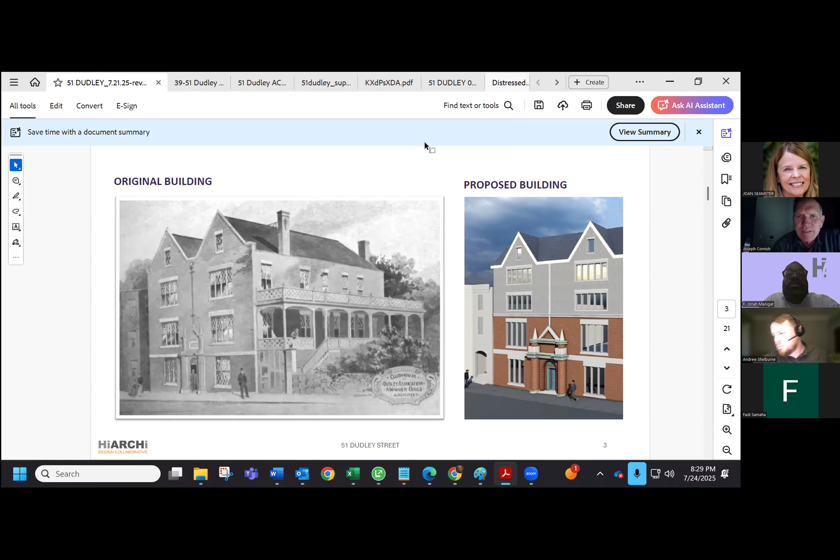But these people here are here for their advice, they've been on the call for quite a long time. If you want to keep forcing the agenda, it's just wasting their time. So I'm just asking everyone to participate. Let's move on. If someone wants to say something, we're all adults. Let's go to public comment if no one else has anything. If you want to chair the meeting, chair it in a proper way. If you could stop sharing your screen, I just need to get my script up here. Okay, thank you, Joe.

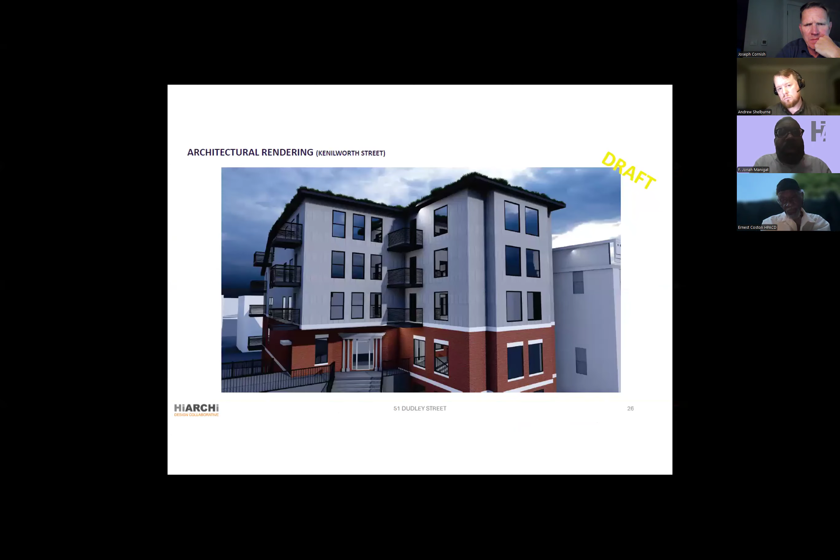Yeah, there were a lot of points made, but since I'm on the road I wasn't able to write everything down. Let me address some of the important things that were said. I'd like to answer regarding what's remaining of the building, since I think that's an important piece that needs to be answered. Other than the porch right now—if you're on Dudley Street, on your right-hand side there's a porch, kind of a relic porch—other than that, the rest of the building is remaining. The exterior of the building is remaining.

Of course, we're going to redo a lot of the work on the inside. Other than the porch that's being demolished, we're keeping the building intact. So when we say we're keeping as much of it as possible, we're talking about demolishing that wooden porch that's attached to the brick building. That's what we mean by that.

Can I jump in, Fred? Sure. So Joan, we thank you for your comment, and we will provide all the clarity required for you to properly calculate the potential of this building. As you mentioned, the building has been through the commission, through this review process with prior developers. We live in the neighborhood, and we have an interest in what we're doing here: to restore the building to its original historical intent, and add a level of housing that's reasonable to the community. We're working with the community directly, with the architectural district directly, and with the city directly. We'd like this to be something that eliminates the blight, which is most important, and secondly—

Who's speaking? This is Charles Robson, the project manager. I'm sorry, Ernest, this is Charles Robson. Yeah, I can't see, but I can hear you. Okay, go ahead. I'm sorry, let me see where we're at here. This is myself here, thank you. Very, very nice to meet you.

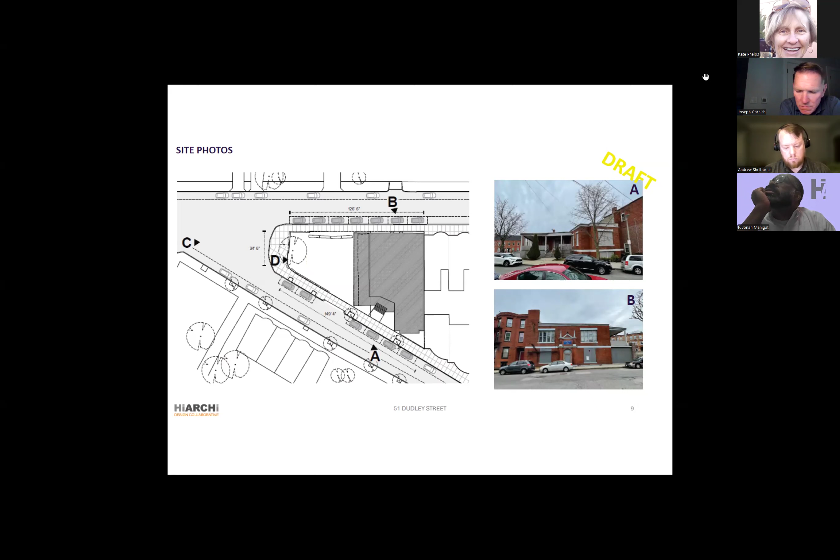Thanks. I would like to first echo what Joan Seamster said. I think Commissioner Samaha has shown complete disrespect for someone that we as a neighborhood put forward to represent us. You don't. And if you're sorry about the pace of the meeting, then go somewhere else. Commissioner Shelburne has done more work, not only in being a commissioner, but in writing the standards and criteria for this neighborhood, and show a little respect.

In terms of the design, I happen in this case to agree with Commissioner Shelburne. I think a closer approximation of the original front would do more justice to its historical importance. Your interest as developers in trying to cram in as many people is not the purview of this commission. Obviously the city wants you to. You can make more money doing it, but that's not something that's going to enhance the neighborhood.

And I'm not sure that a green roof, who, after everybody has purchased their condo, is going to maintain this roof. They're expensive to build and hard to maintain. I'm also not convinced that adding a few inches of green in between two towering adjacent buildings is going to be a place where many people hang out, except the rats. I appreciate there being grass rather than just more tarmac, but I don't think that sells the project.

I also respect what you're trying to do. I'm glad you've picked this up from the earlier developer team that failed to pull this off. We have to consider this, or the commission has to consider this, in relationship to what is being built 17 feet away or 12 feet away. It's a very close fit. And I think the building could look more remarkable in its historic context if it better reflects what used to be there, and I think 3 stories better reflects that.

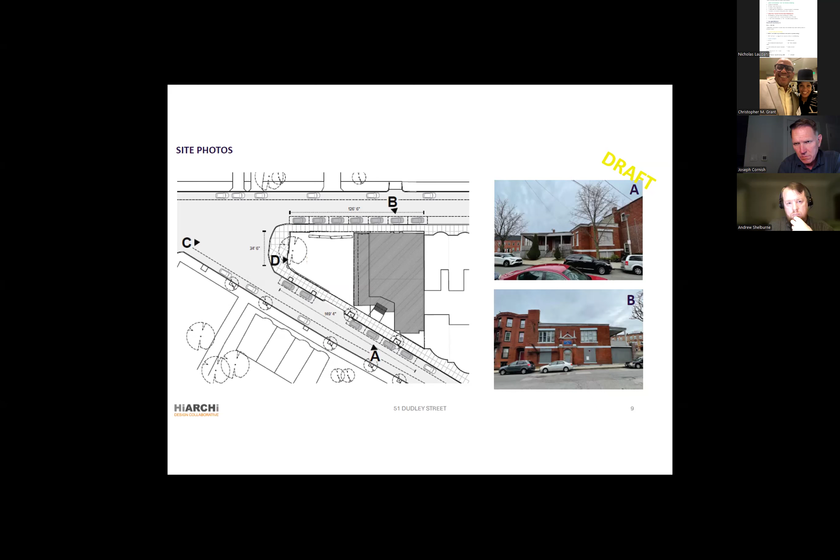Keep it brief please. Thank you very much, I've got my composure back. In terms of this building, it doesn't seem anywhere near as invasive, so to speak. I think it's got a good ideology behind it, that it's doing its best to not take free money off the state. It seems like an honest attempt to try to blend in with the neighborhood. It still might fall short, but that's not for me to say.

I'm not an architect, but I want to chime in again on the procedural aspects, that we need to be alerted to the idea that we are not the last step in the process. Some of us already know this, but right from the get-go, we need to include in our bylaws, hopefully coming soon, that will give us some real teeth here to save a lot of time and money for developers and the commissioners and for all of us. So, like 51 Dudley Street, it's at a stage where it's contingent on review and our architectural standards, but because we lack adopted published bylaws, it renders all this unenforceable, and the idea of criteria and dimensional standards, it undermines the legitimacy of it.

Yeah Nick, you're going in a different direction. No, well, what I'm trying to say, it's 8:45 now. All right, let me put it better. I'm sorry, you're right. I think we need to assert the idea going forward that as we begin projects, we need to empower ourselves. That's what I'm getting at, to solve some of the frustration I'm feeling from a lot of people here, and I understand the frustration of the developers too. I just think this thing is a little broken. It needs to be fixed.

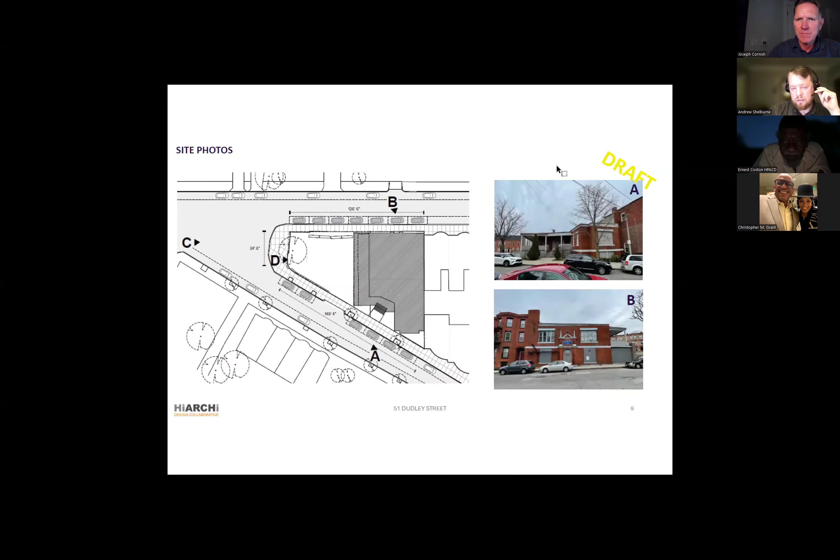Okay, all right, we'll look at that letter. Yeah, again, we covered a lot of it. All right, I'm going to close public comment now, and let's move to staff updates, Joe.